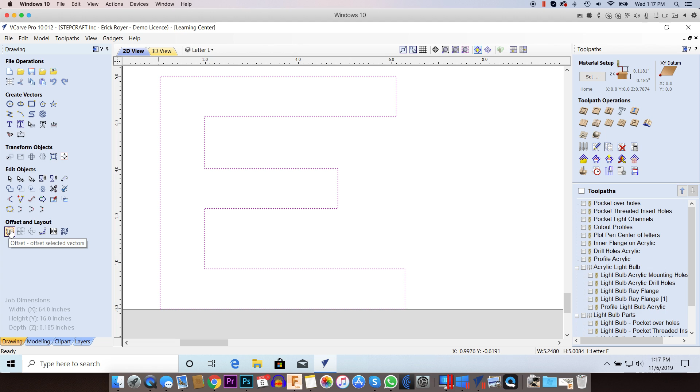So to do that, to set up the pocket, all I'm going to do is come over here to the offset selected vectors button, and I'm going to offset inward by 0.2 inches. And I'm going to make sure create sharp offset corners is checked. Delete original and select new will be unchecked.

When I click offset, you can see now I have my sidewall here, which is, if I measure it just to show you, it's from here to here. And it's exactly, if you look over here where distance is, it'll say it's 0.2 inches. So that's my sidewall all the way around. Now, if I measure my pocket width, it's roughly 0.4656. So just under a 1/2 inch. So I still have plenty of room given the fact that my LED tape is 0.32 inches. Okay. So that's basically all there is for setting up the pocket of the letter.

Now, the next thing we need to do is figure out where we're going to put standoffs on here to mount the letter to the wall. The threaded inserts I like to use are from a company called EZ-Lok. So their website is ezlok.com. The nice thing about these is they're a really good quality threaded insert, but they're also available on Amazon. So if you're in a hurry for parts, like I was, I was able to get these delivered next day.

So there's a few different types. They have ones for metal, ones for wood, and ones for plastic. Now, I am using PVC, or Sintra, for the actual letters, which is technically a plastic. However, I'm not going to use plastic inserts. If I was using a denser plastic like HDPE or acetal, I would use a plastic insert. But the consistency of Sintra or PVC is very similar to that of a softwood. And I find that the wood ones work better in that material.

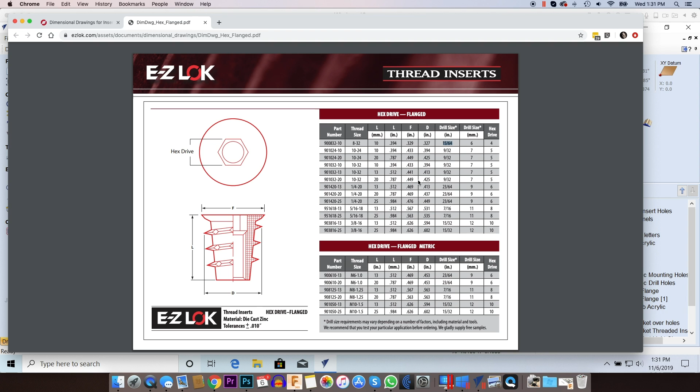And then the last thing we need to know is the hole diameter that we need to make in order to thread this insert into it. Okay, so the drill size is the next dimension we're looking at, which is 15/64, and in decimal, that's 0.234 inches. Okay, so those are the dimensions we need. That's all we need from this chart.

To get back to the project here. Now, for the placement of the threaded inserts, I like to use opposite corners if I can, because if I use two inserts at the top, the letter could have a tendency of leaning down and the bottom of the letter leaning inward towards the wall. And I want the letter to sit parallel to the wall. I find that by putting them in opposite corners, once you push the threaded rod into the wall, it stays nice and parallel and in place.

To do more than two is really unnecessary because, again, the letter doesn't really weigh anything. You're just making more work and using more hardware. So I opt for two, and I do them cross corner. Now what I will do is put one in the outside corner here and then one on the inside corner here. So the next thing I need to do is draw some circles.

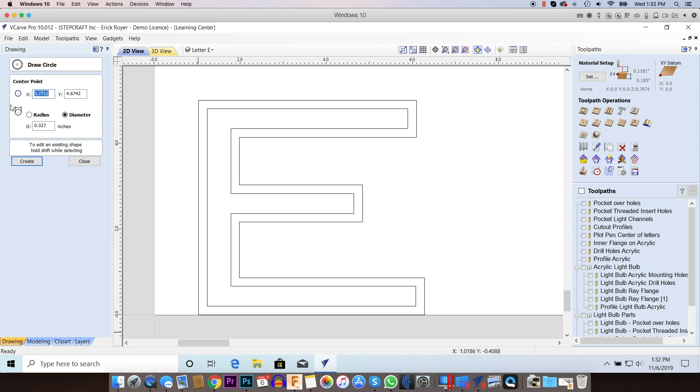Now the first circle I need is the overall flange diameter, which is 0.327 inches. And we'll go ahead and create that circle. The next circle that we need is going to be the hole diameter, which is 0.234. And we'll go ahead and put that right in the center. The length measurement we'll get to later when we do the CAM. Okay, so I'm going to take these two and move them manually.

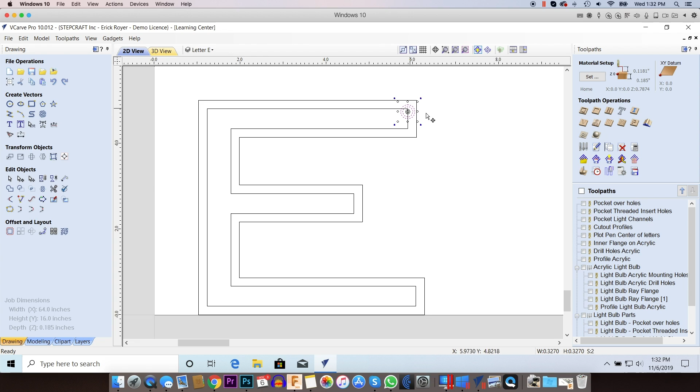Now, what I need to be careful of is the hole is actually going to be a pocket, and it's going to go down. The center hole is going to go down a minimum of 0.394, which is the overall length of the standoff. The outer circle will be a pocket, but it only has to go down to where the flange is going to be. So I need to be careful that I don't take too much meat out of the sidewall of this letter, or it'll get really flimsy and frail in these corners.

Okay, so what I like to do is move it down so that the corner of the inside of the pocket matches up with the edge of the actual hole that you need to make for the insert. Then the flange will just get machined away from the sidewall, but since you're only going down a little bit, you're not really taking away from the structure of the sidewall of the letter. So that's where I'm going to leave this one. And now I'm going to make a copy of it, and this will go in the other corner.

Now I apologize, I'm using a Mac mouse and it's really sensitive for the zooming, so I don't mean to make you dizzy here. I'm going to go ahead and just move this roughly to that corner.

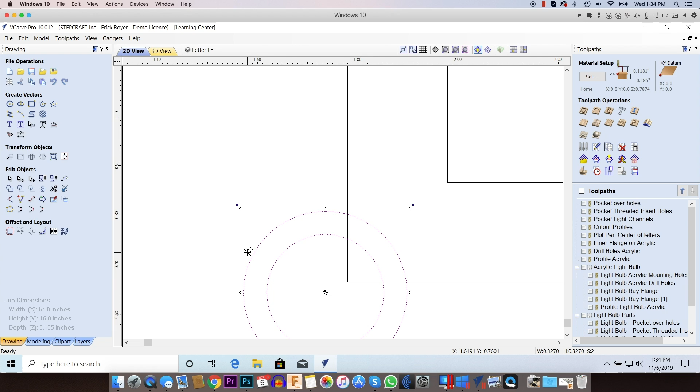Now, in this case, because it's going on the inside of the corner, I'm not as concerned about my sidewall width here, because there's actually quite a bit from the edge of the circle to this inside corner. So what I'll do here is just arbitrarily put this circle. I want to put it so it's relatively the same dimension here and here.

I want to make sure that I've got enough room for the LED tape to go by. So that's my biggest concern. So I'm going to leave this here right now. And then I know that my LED tape is 0.32 inches. So I'm going to measure from this point to the sidewall, and I've got 0.34 inches, so that's good. And then I'm going to measure from this point to the sidewall, and I've got 0.26 inches.

I'm okay this way, but I need to move the circle up in this direction. So I'm going to go ahead and highlight that, just move it up a little bit. Measure it again, and now I've got 0.29, so I'm going to move it up just a hair more, and I'll measure it again, and we should be at 0.33, so we're fine. So that means the LED can pass through both directions right here, and I'm not going to have any issues

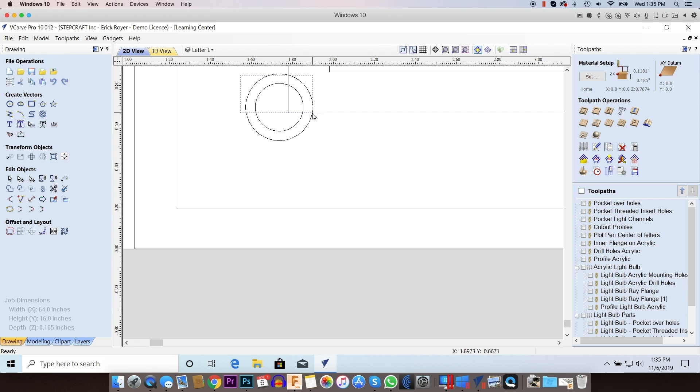right there. Now, I could have positioned this with an actual position indicator, so I could have highlighted this and then gone to move selected objects, and I could have, from a relative position from where it was, said, okay, move it up 0.3 or 0.2 or whatever that dimension would be. I just did it kind of the long-handed way,

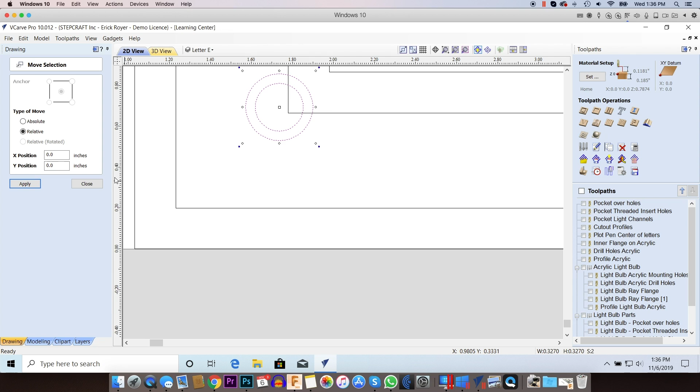but if you know that you measure and you're 0.26 and you know you need a minimum of 0.32, then you could subtract the two, and that's the value you can put in the Y position, and that would have moved this relative to where it was before. So you can do it any way you want, but you want to make sure that there's enough room here and here for the LED tape to pass through. That's the bottom line.

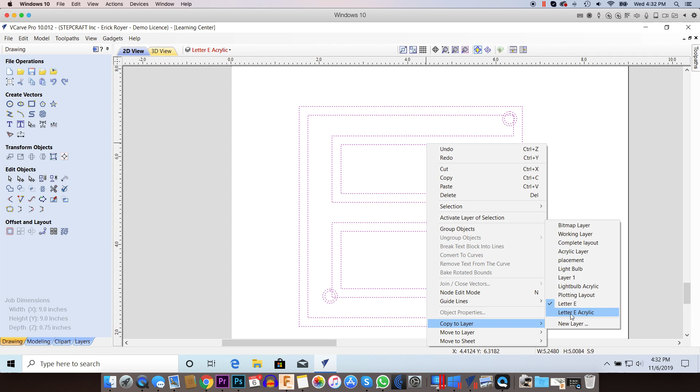Now the next thing I'm going to do is, I am now looking at the front face of this letter, but the pocket actually has to go on the back side of the letter. So that means I have to take this entire letter and flip it. But before I do that, I want to make a copy of it as it is right now, and transfer that copy. So I'm going to go to copy to layer. I have a new layer called letter E acrylic, and I want to make a copy of these vectors and send them over to the acrylic layer.

So now I have a duplicate copy here on the acrylic layer, and then I have the working layer that we're on right now. So I'm going to go ahead and flip this. We're going to go to mirror selected object and flip horizontal. So now I'm looking at the back side, and this is how I want to machine the material and create the pocket. So the next thing I have to do is get the scissor tool. There's some vectors here that I do not need.

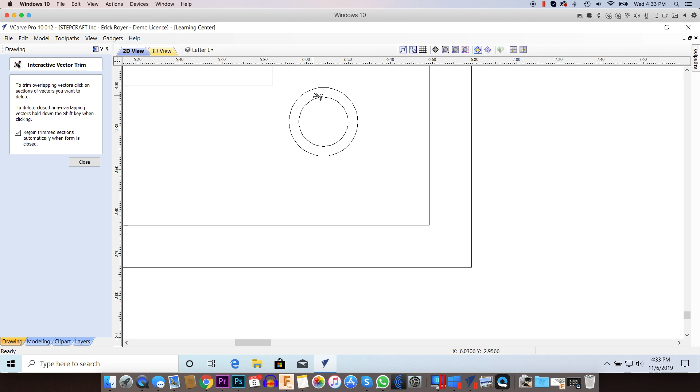Right now, the small circle is the hole that we're drilling or milling out for the threaded insert. So all I want to see is that circle. That means I do not need those vector lines that are inside there. The other thing is this larger circle, I'm going to pocket down for the flange, so I do not need these straight vectors that are right there. So I'm going to do the same thing over here. Get rid of these vectors I don't need. Okay.

All right, so now I need to create the vectors that we are going to machine around. If you look here, I'm going to machine around the inside of this vector here and this vector. So I want to machine basically around the inside of these pockets. Now, I have this flange here and then the hole. It's important for me to have this much material outside of the hole that I'm pocketing out for the threaded insert so that there's something for the threads to bite into.

So what I want to do here is machine up to this point and then around the perimeter and then continue on. So what I will do here is create a copy of this vector, and then I'm going to come over to the scissor tool and just clip this outside. And what that'll do is connect that. So now I have my inside pocket.

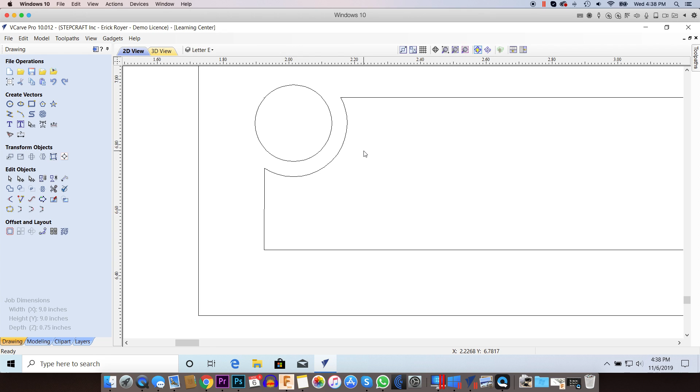Then I'm simply going to hit the paste key, Control V, and that's going to put the circle back because I'm going to need that circle for a vector to machine later. I'm going to do the same thing over here, Control C to copy that, then I'm going to grab the scissor tool.

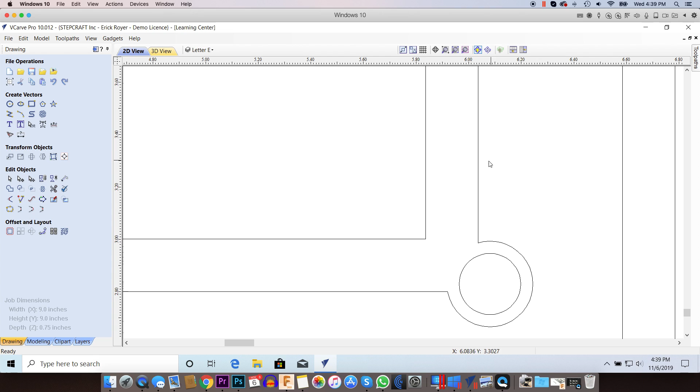Now this time, this is the inside of the pocket, so I want the end mill to go around this perimeter. I'm just going to clip that, and that should have connected all of those, which it did. Then I'm going to do Control V to paste, and I'll paste that circle back there.

So now I have my vectors all created for machining the inside pocket here, and then for machining the circles where the flange is going to be.

Okay, we're ready to start doing our toolpathing. We're going to go over to the toolpaths tab and pin that so it's there. You'll see I have a bunch of toolpaths here from the job as I did it prior, and I'm going to go through some of these and explain how they're going to work so we can properly cut this letter out.

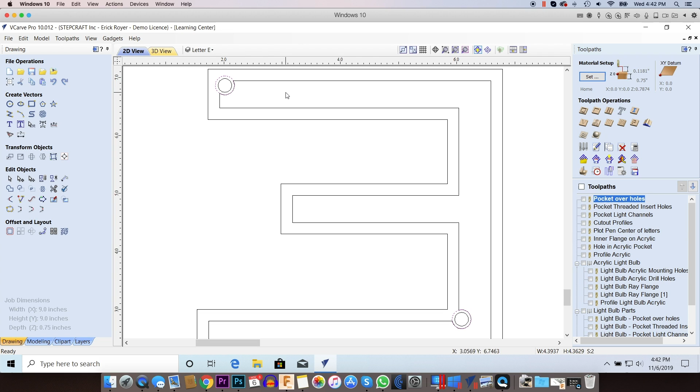So the first toolpath we're going to use is called Pocket Over Holes, and it's basically going to take care of this circle, the larger flange circles. I'm going to machine those down 0.2 inches, and that's where the flange of the threaded insert is going to rest on.

I'm using an Amana 43600, which is a solid carbide double straight flute bit made for plastic. The speeds and feeds I'm using are based on Amana's recommendations for the Stepcraft Q machine, which is what I'm running this job on. Your machine, if it's heavier duty or lighter duty, you may have to adjust your feeds and speeds accordingly to your machine's capability and your spindle's capability.

So I'm going to do an offset toolpath because I'm cutting out a pocket and it's circular. I'm going to use a 1/2 inch ramp, which I always use as a minimum when I'm using straight bits on my material. So I'm going to calculate that and preview it, and you can see I have 2 pockets.

So the next thing I want to do is the threaded holes. I'm going to select the 2 smaller circles, and because I machined the larger circle down 0.2, that's going to be my starting location. I don't need to start at the top of the material, I want to save machining time.

The cut depth for these threaded inserts is 0.394 inches, so I'm just going to round that up to 0.4. So I'm going down, I'm going to start at 0.2 and go down 0.4 inches from there using the same end mill. And I'm not going to ramp this one because it's a small hole that I'm basically machining out, so I don't need a ramp for that.

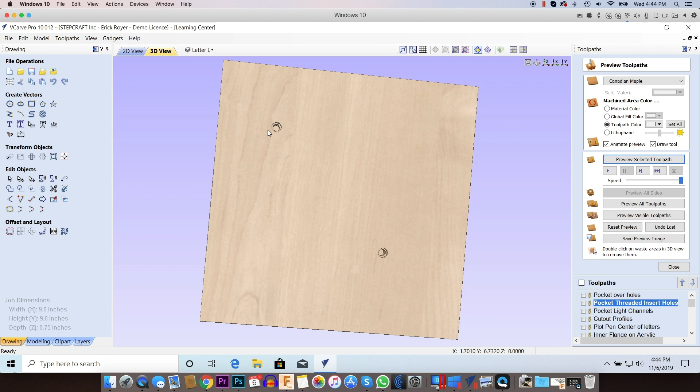And I'm going to use an offset toolpath. So when I click calculate and do preview, you can see now I have the pocketed hole on top for the flange, and then I have the hole for the threaded insert.

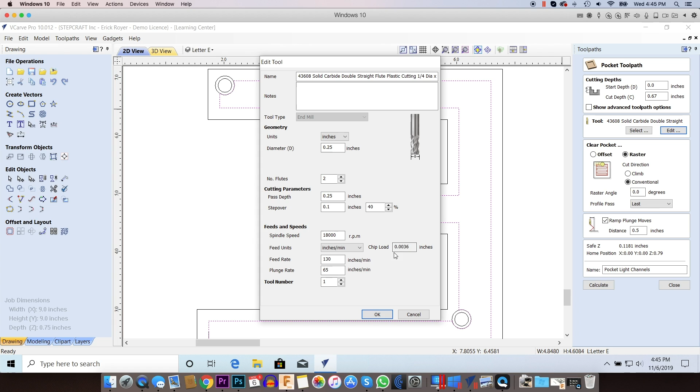I'm using an Amana 43608, which is a solid carbide double straight bit, 1/4 inch, made for plastic. So that's what I'm using on this one. Again, my speeds and feeds are according to Amana's recommendation, and you'll have to adjust those accordingly to your particular machine. But I am running a chip load of 3.6 thousandths.

This time I'm going to use a raster toolpath, mainly because it's not a round object, there's more straight runs here. I'm going to leave it at 0 degrees, so I raster along the x-axis. That's because I've got 3 segments of the E that are in the X orientation, and then only this vertical part in Y. So machining in the X orientation with raster is going to give me the best time and good result for that.

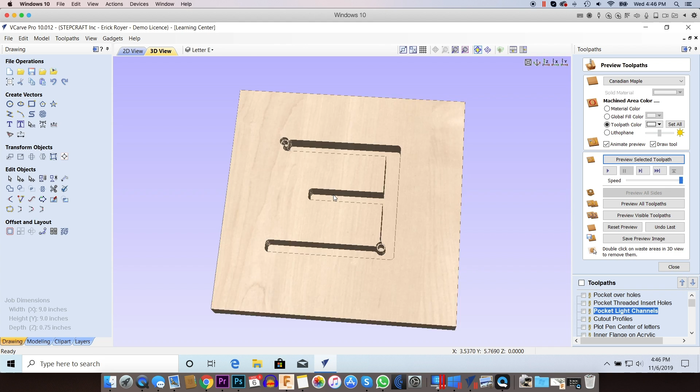I'm going to ramp my plunge 0.5 inches, and we'll go ahead and calculate that. Now when I preview this, you can see this is what we're looking at so far. I've got the flange, the hole for the threaded insert, and now my pocket that goes all the way around for my lights.

The last thing I'm going to do here is a profile toolpath, and what I need to do is select the outside vector. I'm going to use that same 43608 end mill, and I'm going to go down, because I have double-sided tape that I'm holding this letter to, I don't want to go much past the bottom of the material because I don't want the end mill to get gummed up with tape.

So I'm only going 2 thousandths below the material thickness. And this machine is very accurate, so I know that if I'm at 2 thousandths, I'm just nicking the top of the tape, but I'm getting a clean cut all the way through my material.

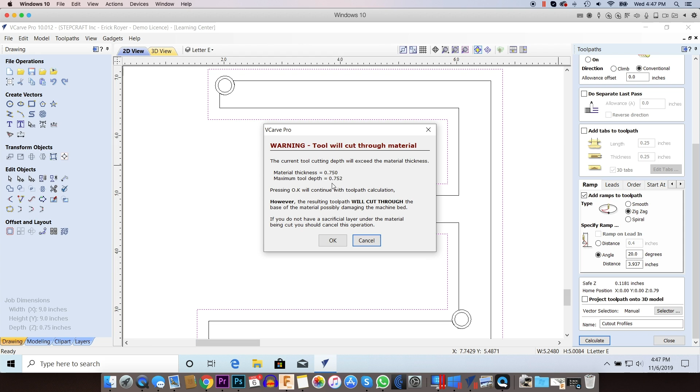I'm going to cut along the outside, going conventional. No separate last pass is needed, and I'm not using tabs because I'm using double-sided tape. I'm going to do a 20-degree zigzag ramp into the material and click calculate. It's going to warn me that I'm going below the depth of the material thickness. I'm going to click OK. And now I'm going to go ahead and preview that.

So when I double-click the waste material, this is what I'm left with. There's my letter, my flange, my holes, the pocket for the lights. And if I flip this over, this is the front of the letter, which is what you'll see on the wall, and this is the side we're machining, which is the back.

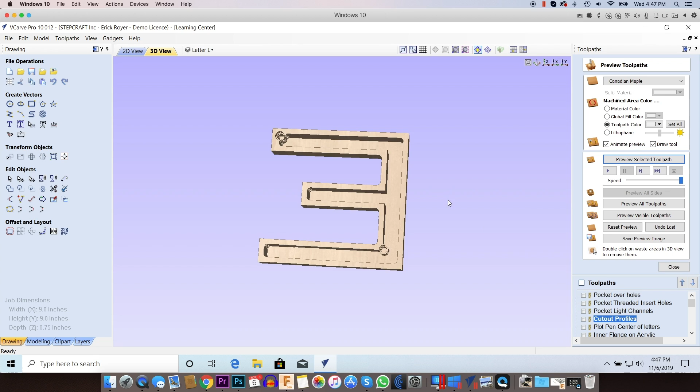Now that we have the toolpaths all programmed for this letter, we have to go back and make another change to the inner vector. The reason for this is we're going to have an acrylic cap placed on the back of the letter, and that's where the light is going to shine through and be diffused. It's going to show on the edge of the letters, then diffuse onto the wall.

I have 2 options when it comes to aligning that cap on the back. The acrylic piece is going to follow the profile of the outside vector here, so it'll be exactly the same shape and size. So when you stack the 2 pieces together, it fits perfectly.

Now, in order to ensure I have the correct alignment and make things easier, I have 2 options. One is I can measure the diameter of the threaded rod and use a small hole in the center of each of these locations that's the diameter of a threaded rod, using the rod as a locating feature. The problem with that is technically a rod is not the best thing to use for location.

What would be better, and what I've found works much better and gives me a cleaner end result, is to utilize this inner vector as a locating feature. So when I do the plastic, acrylic part of this, what I'm going to end up doing is creating a pocket from the outside vector to the inside vector.

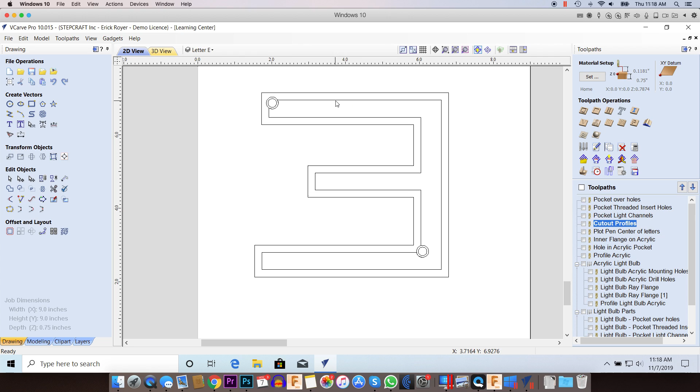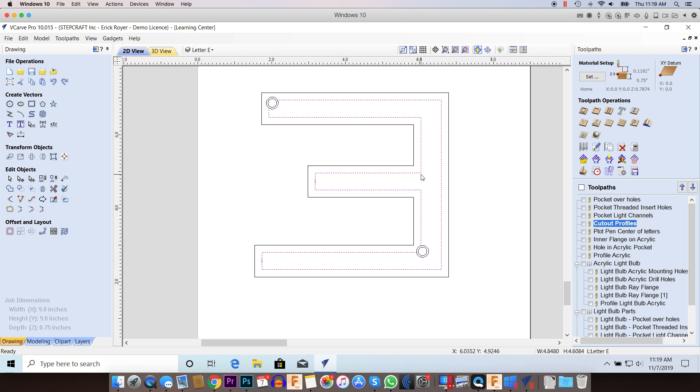This center part now, instead of being recessed like it was on the letter, the part outside of that will be recessed. So this will be the original material thickness. And because I'm going to cut outside this vector on the plastic, all of my corners are going to be straight, and my inside corners are going to be rounded. So I need to make sure this is going to fit properly and snap together.

Now the end mill I'm using is a 1/4 inch diameter. So I want to draw a circle and show you what's going to happen when we machine this. You can see if this is the end mill, when it comes in, it's going to go up to the point where the end mill hits this wall, and this area in the middle is not going to be cut. That's a problem we're going to have there.

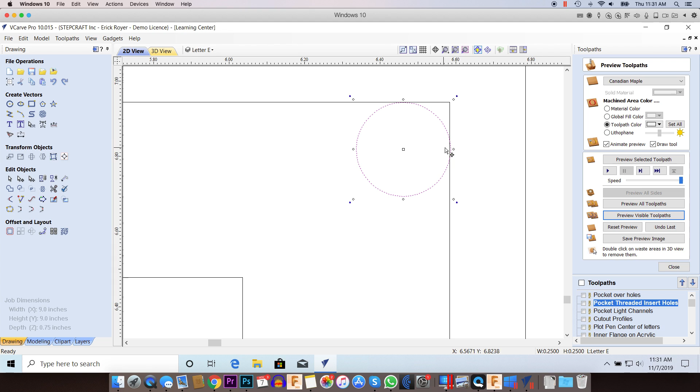So what we'll do is add what's called a dog bone fillet to the corner, and that'll round out this corner so that the straight corners from the acrylic back piece will fit in there without any interruption from an unmachined part of it.

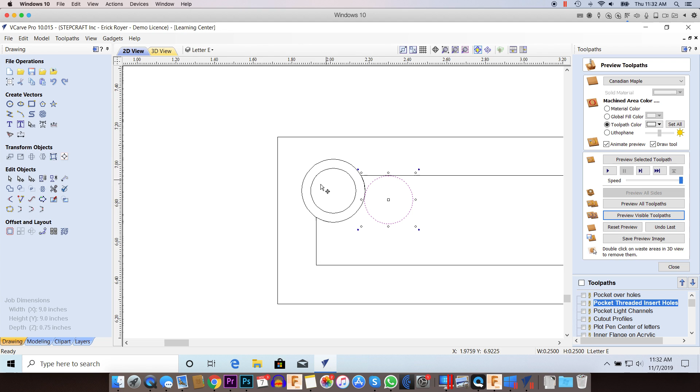We have the same problem over here. When the end mill comes into this side, there's an area that won't get machined. Since this is more complicated, I'm just going to modify the vector on the acrylic part and put a straight line down here so I don't have to worry about it. The acrylic pocket will end right at this point, and that'll take care of the issue.

So what we need to do is create the dog bone fillets now, using the fillet tool. I'm just going to add fillets to all of these corners, so that when I have a square piece, it fits nicely in the corner. The insert is going to be square, and adding the dog bone fillets makes it fit in the corner properly.

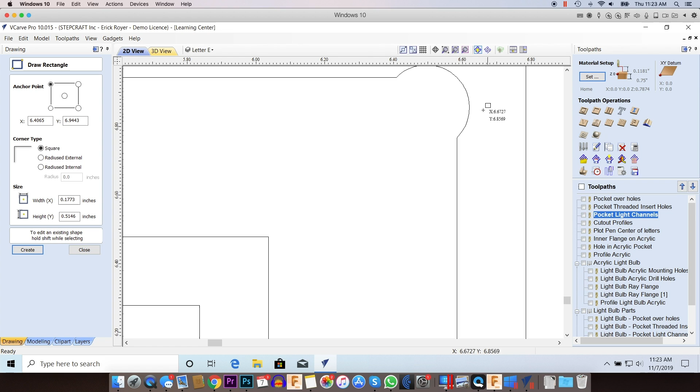The other thing I need to do is put a radius on the outside here, but instead I'm going to do a dog bone fillet on the acrylic itself, so that way I don't have to mess with these outside corners right here. So that shouldn't be a problem.

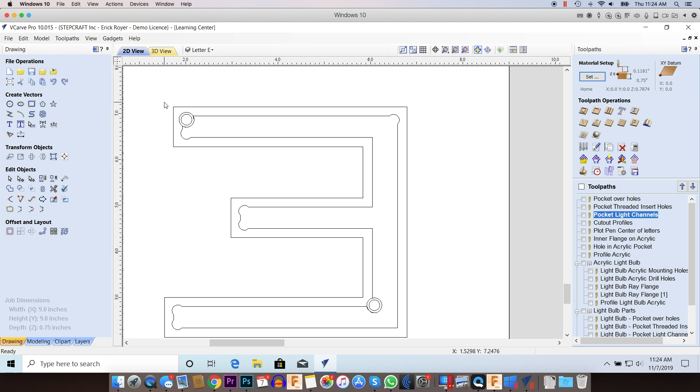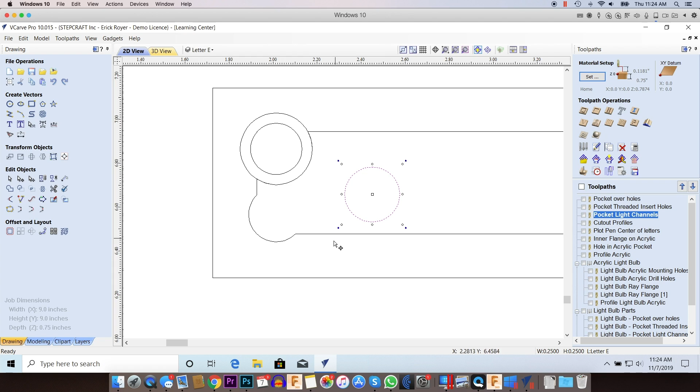The last thing I have to be concerned with is dealing with this area around where the threaded insert goes, because using my end mill, which is this size, I obviously can't get into this whole area. And when I come on this side into the fillet, there's an area I can't reach. So I'll redefine the end of the vector on the acrylic to make it fit. For right now, I'm not worried about that. It'll end up how it ends up.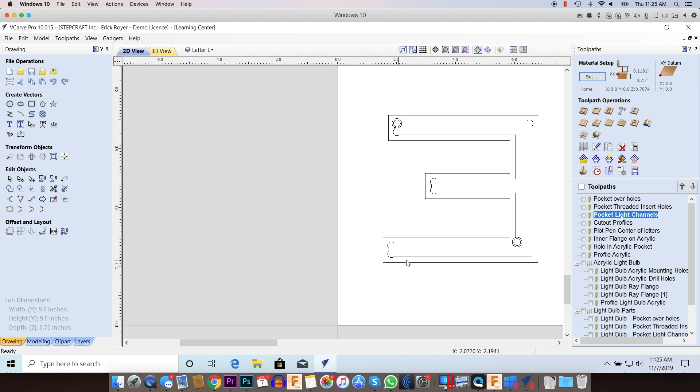Vectric will only machine far enough in to where the end mill reaches the point of contacting two opposing vectors. So this area will not get machined, and that'll be okay. It won't matter for this. It's going to work out perfectly fine. The main thing was making sure all of these outside corners had dog bones on them so the plastic will fit. So I want to recalculate the pocket light channel.

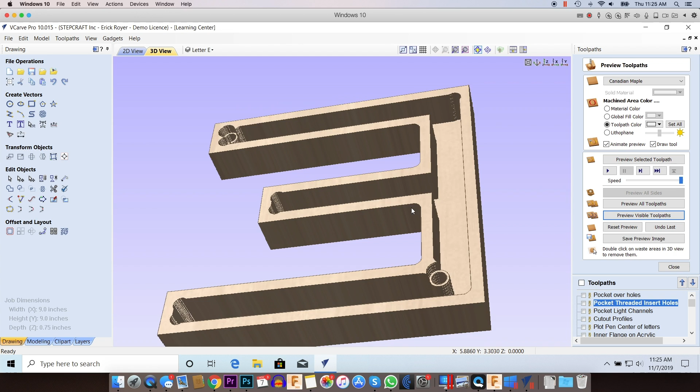We're going to go ahead and preview that again, and you'll see now that it added the dog bones to it. So when I do that, this is what we get for the final letter, and this is all set to machine now. We can bring that out to the CNC and machine the plastic part of the letter out of the 3/4 inch material. Then the next thing we're going to do is work on the acrylic cap for the back of it.

Now that we've got the pocket and the letter milled out of PVC, it's time to work on the acrylic layer. First we need to remember that we copied the vectors and sent them to a letter E acrylic layer here. We want to turn that on and make sure it's bold so it's selected, since we're going to be editing in that layer.

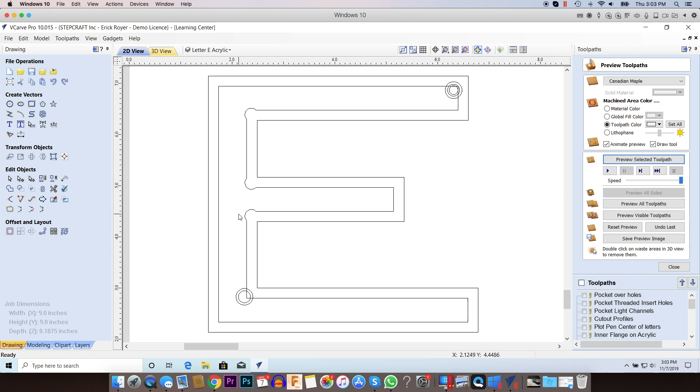We'll add dog bones to those three, and we should be all set there. Now the next thing, if you go back to the original letter that we did for the pocket, remember I said we had to deal with this screw hole here and this hole here. And because of the complex shape around there, I wasn't going to try to manipulate that so that the end mill would cut properly. So what we're going to do is on the acrylic, we're going to just reshape the vector here so that we don't have to worry about a pocket in this area or in this area.

So to do that, we're going to go back to the acrylic layer, and the easiest thing to do here is simply just draw a straight vector line down in this like that. And what we'll do is we'll pocket everything outside from this vector outside to this vector. So we'll pocket this whole area out above the screw, so it won't be an issue when we place these two together.

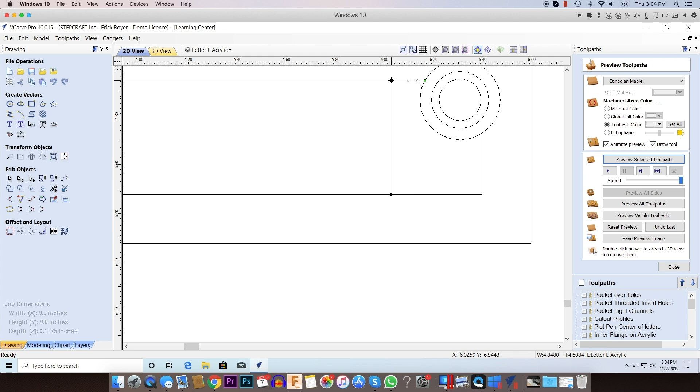So what I need to do now is we're going to go into node editing mode, and I want to insert a point here and one here, and then I want to cut those 2 points, and that will allow me to remove the vectors outside that. And now I'll just join these back together. So there's my new vector. And so now what I'll do here is I will pocket from this vector out. And like I said, I won't have to worry about anything hitting that where the screw was.

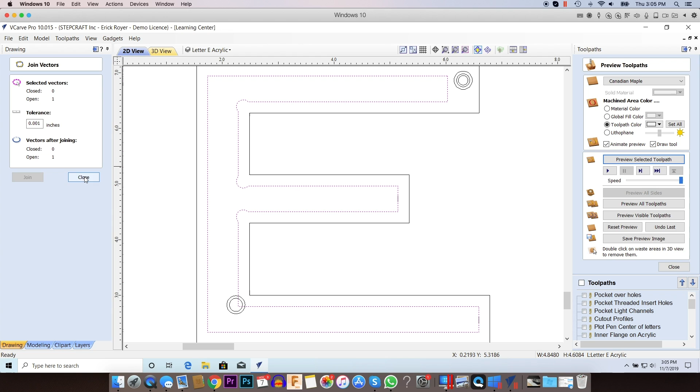Now I'm going to do the same thing over here, except in this case, I'm going to draw a vector out, down, over, and up. So I'm just going to box in kind of around it. And as long as my 1/8 inch end mill will fit through this channel here and here, we should have no problem.

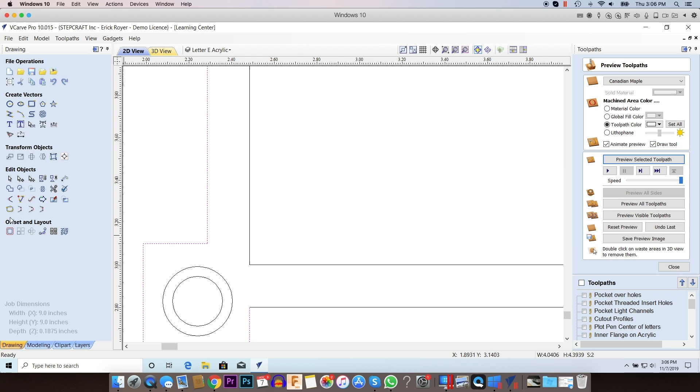So I'm going to do the same thing here. I'm going to go to node edit. We've already got these 2 points. I'm going to select here. Going to insert a point there, and then use the C key to cut those two. What that'll do is free up this vector, and then I can simply join these two. I may have to zoom in a little bit more and check. And I've got a little hanger there and a small one, it looks like right here. Okay, so now that's all joined together.

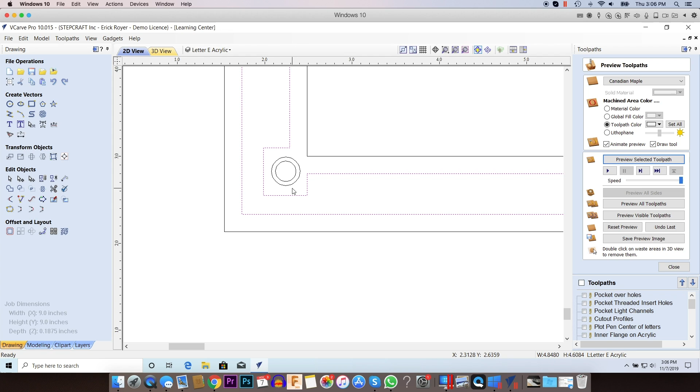So now what I'll end up doing on this part is I'm going to pocket out everything from inside here out, and this inside these vectors is going to be left alone. That'll be the original height. So again, this area where we had the weird geometry going around the standoff pocket, I don't have to worry about it. It won't be an issue.

All right. The last thing that we need to do is if you cut pocket from this vector to this vector, and then you come back around later and you do a profile around this vector to cut the letter out, there's a possibility you'll end up with a very, very thin piece of plastic right on the line of this vector that's uncut. Then you'll need to go back with an X-Acto knife or something and clean that up afterwards. When I use a CNC, I hate to have to do a lot of post work, so I try to make my CNC files and use tooling and things to minimize the work I have to do once the piece comes off the machine.

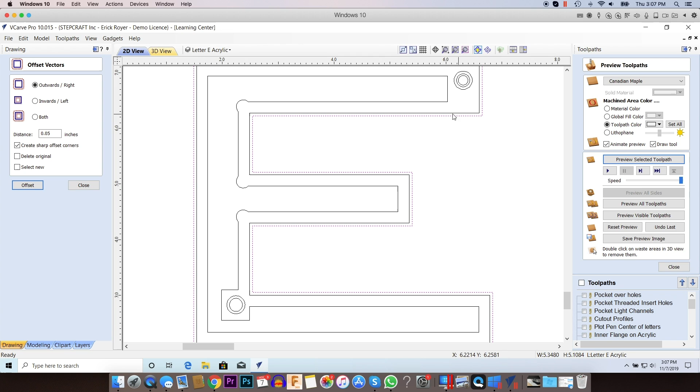So the easiest way to deal with that is to select the outside vector, then go over here to offset, and we're going to offset this outward about 50 thousandths, so 0.05, and make sure create sharp offset corners is selected. What that'll do is create a new vector, and now what we'll do is we'll pocket from that new vector to this one, so we're slightly pocketing past the vector that we're going to cut the profile out of, and that'll ensure I have a nice clean cut all the way around.

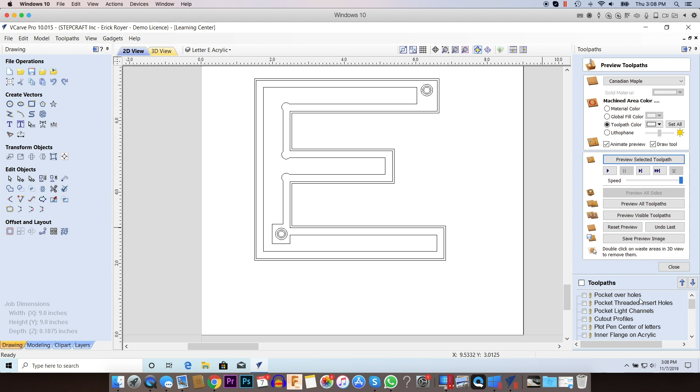So that's pretty much it. This file right now, we're ready to do the CAM on it. I did notice that I'm missing a circle for some reason right there for the additional screw hole. So we're good. Now the next thing we'll do is we'll start the CAM. So I have a toolpath here called inner flange on acrylic.

And I'm going to select that. And what I want to do is I only want to remove about 20 thousandths of material from this inside edge to the outside. I want to make sure I have as much thickness of the acrylic when I look at the side profile of the letter as possible. So in order to do that, I just need to have enough material removed so that I have an alignment feature that'll snap together with the other part of the letter. So 20 thousandths is really all I'm going to take away from this.

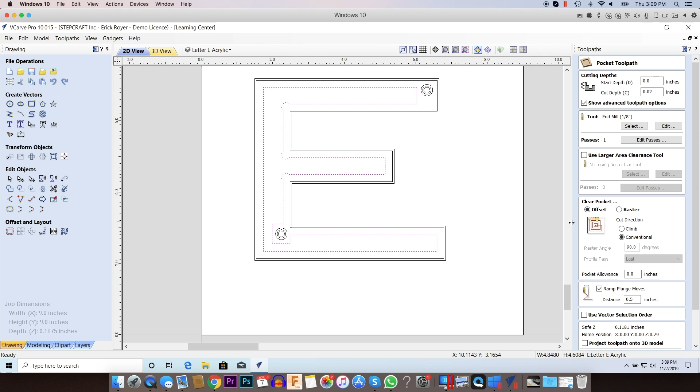I'm going to use the same 1/8 inch end mill I'd used on the other part of the letter. I want to cut this in an offset pattern because basically I want the end mill to follow the outline of the letter. I don't want it to go back and forth and have to deal with small areas like this. The cut time is going to be a little quicker using an offset toolpath. Let's see, I'm going to leave a 1/2 inch ramp, and that's pretty much all I have. Now we're going to select the inside vector and the outermost vector, and then we're going to calculate from there.

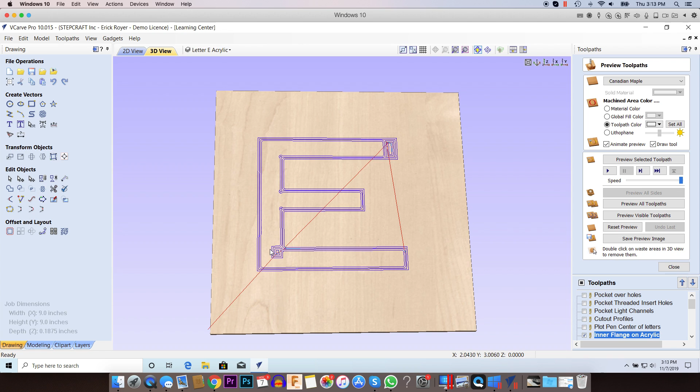Okay, so now you can see our toolpaths here. They follow the new vectors that I have in this kind of squared out area. We're going to go ahead and preview that. And as we zoom in, if you look here at the Z, it says Z0. That's the top of the material. So in this area, that's material that has not been removed. But if I move over to this area, it's minus 20 thousandths, showing that that's what's been pocketed. I've got my 3 dog bones here, I've got this pocket in the corner, and this vector was shortened up, so I won't have to worry about any interference from the threaded hole inserts.

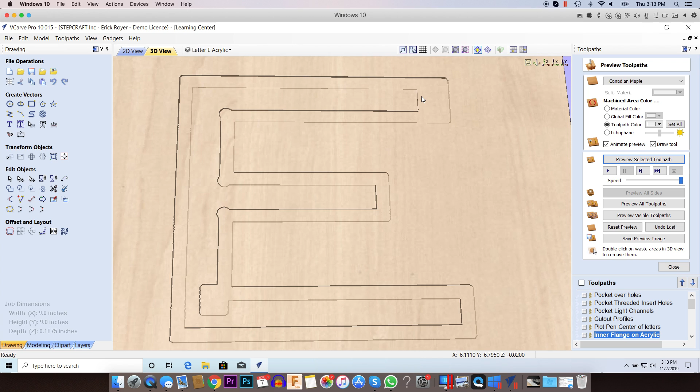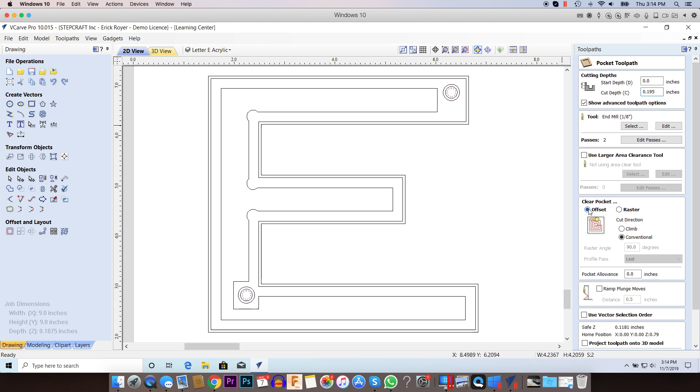Okay, so the next step here is we've got to do the holes. So I have a hole in acrylic toolpath. What I need to do is select the 2 innermost circles. My material is 0.1875. I'm going to go down 0.195 here. That'll put me into the spoil board a little bit, but it'll make sure I have a nice clean cut on both sides. Same end mill, there's no tool changes. I'm going to use an offset toolpath because it's a circle. No ramp because it's a small hole, and then calculate that. It's warning me that I'm going to go into the spoil board, and I'll preview it, and you can see I've got my 2 holes there.

Last procedure we have to do is the profile. We're going to do a 2D profile toolpath. We're going to go down 0.195, which is going to send me into the spoil board a little. Same end mill. We're going to go outside the vectors. No last pass. Now tabs are up to you. I'm using double-sided tape. I didn't want to have to deal with any sanding or trimming of tabs later. If you want to add tabs, you can certainly do that. Some letters are going to be more difficult than others. The E is pretty simple because there's a lot of straight edges, but a letter like an S or an O would be more difficult because there's a lot of curves, so you'd have to put the tab along a curve. So completely up to you. I just prefer double-sided tape.

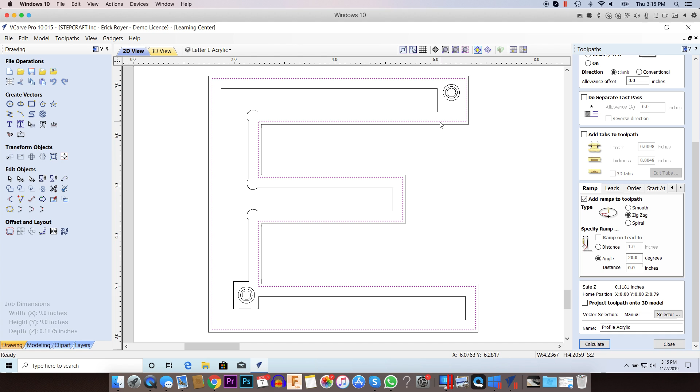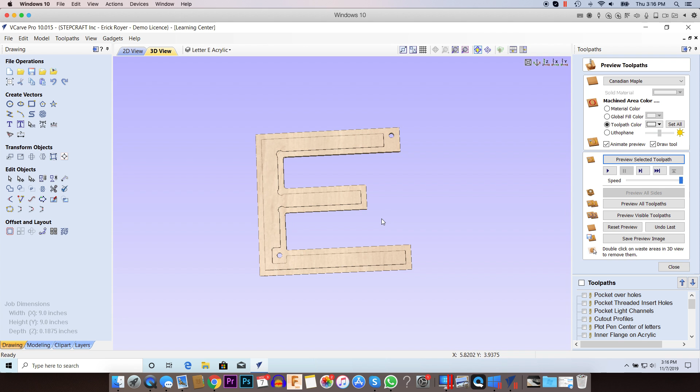We are going to add a zigzag ramp at 20 degrees just so that I enter the plastic at an angle. And I want to make sure that the second from the outside vector is selected. That's where we're going to cut this from. So we're going to click calculate and hit preview. Now, as you can see here, this is what the acrylic is going to look like after it's been cut. I have the pocket here and the shortened vector on this side to keep me away from where the holes were. I got my dog bones, and this is all set. So this will be the part that's closest to the wall, and the letter that we did out of PVC will snap over the top of this, and that's the one that'll have the LEDs inside.

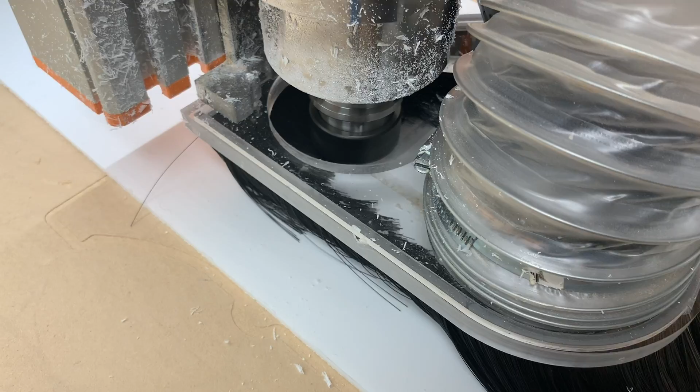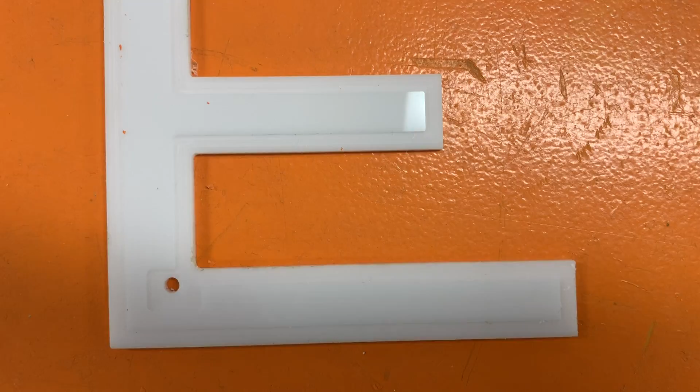So now that the acrylic layer is done, in the next video, I'm going to show you how I did all of the assembly and how we install the letters on the wall.